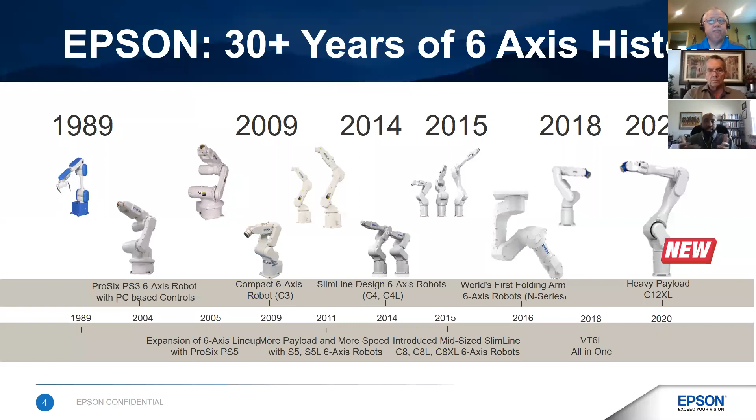But as you know, as you get done with that assembly, it has to go into some type of package, and that package has to get put on a pallet. So as you look at all of that, we want to start to move into owning that entire line, not just that process, but the entire line. And so with the C12, you see introduction to get into end of line automation.

All right. Well, just real quick, some of the basics. It is a 12 kg payload. It is a 1400 millimeter reach. It does use that Quartz MEMS. There it is. We're about to get into it. But you've also got it available as a clean room and an ESD model. Are you seeing lots of demand for the clean room environment for this size arm?

So because it's a new product, I would say time will tell, but we can say with our C8 and with our C4, the clean room, the ESD is something that a lot of customers tend to go after, especially when you get into medical, pharma, or places like that, where you have to really be on guard. You need to watch the particles, make sure it's a clean environment, and make sure you don't damage the equipment. In the event that you're doing medical, you want to have ESD models available to make sure you don't have that static discharge that could damage the product that you're handling.

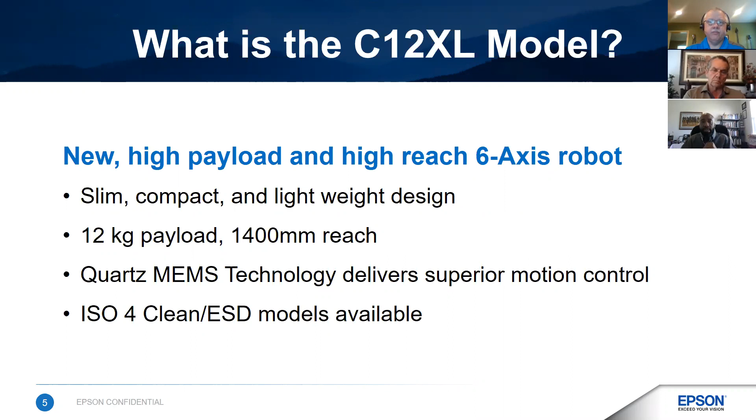So I would say on the C12, we expect the demand to be high, as we've seen it for some of our lower payload 6-axis. So we anticipate that it'll be there for the C12 as well. Okay, real good. Well, without further ado, I did want to be able to show what the robot looks like actually moving around. So this is the C12XL.

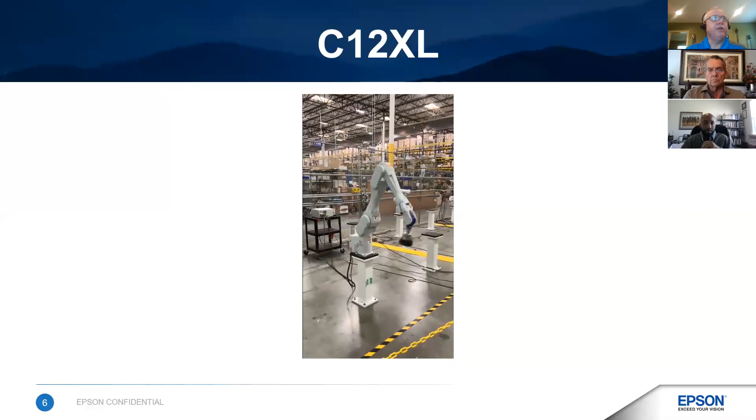It is a 1400 millimeter reach. It is a SlimLine design. One of the things that I've noticed with my customers in the C4 and the C8 series is that SlimLine design really allows you to fit in a very tight space, a very tight environment.

But one of the unique things that I liked about the way Epson designed the base for this is that it allows the robot to get very close to its own base. So that if you're in that tight environment, you need to load that pallet, you can get it up close and be able to reach it, and you still have the motion to be able to move towards it.

Casey, do you find that having this SlimLine design, this ability to have that broader reach towards the base of the robot, helps deploy this in applications that more traditional design 6-axis robots aren't able to do?

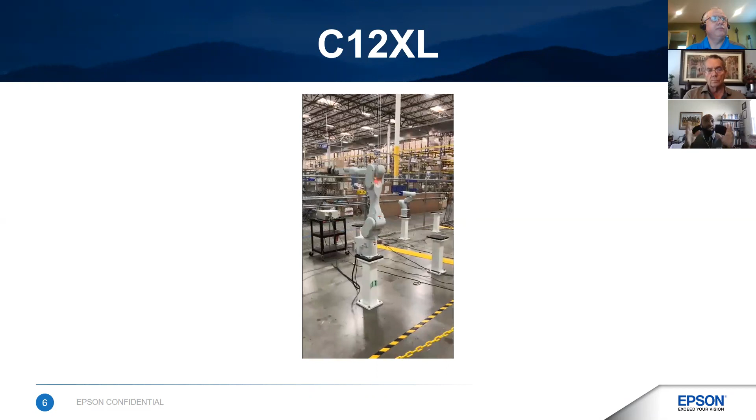It does, because when you look at traditional robots, when you get into that 12, 20 kilogram space, the base is a lot heavier, a lot bigger, a lot bulkier, which means you're limited in your movement. You won't be able to sit back and reach underneath itself if it needs to. And if you are confined in movement, you can't take advantage of the full 1400 millimeter reach that you have. So because of this design, I think people will be pleasantly surprised at the actual movement that it has.

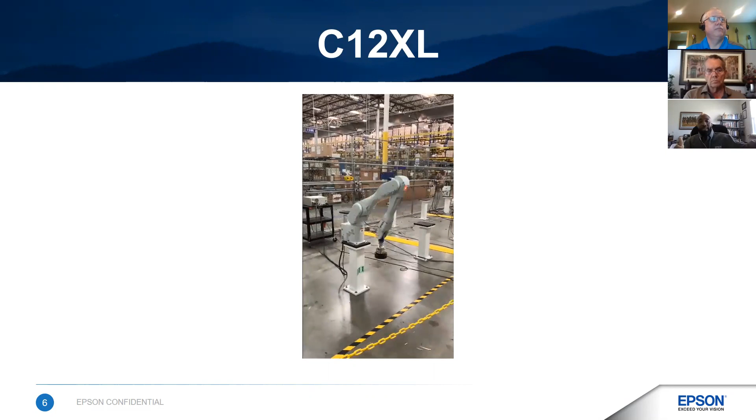And this video shows that this is a real product. It is out. We don't say, hey, it's going to be out within a month, 6 months, a year. This is out right now. We just released it this month. After we vetted and tested it, it is ready to roll.

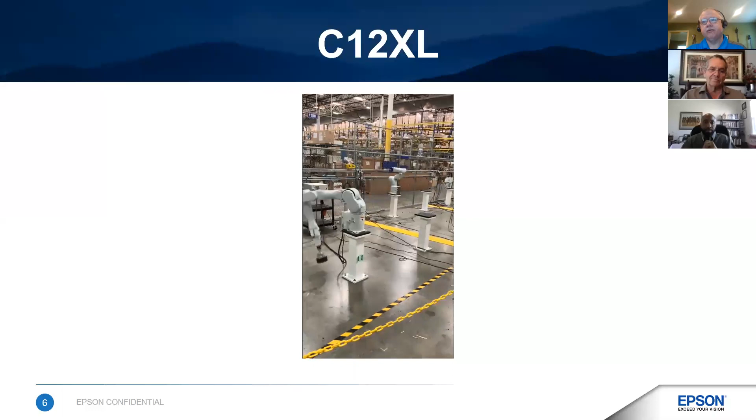Yeah. Hey, Michael, I'm going to put you on the spot for a minute. I know that with Epson, large corporation, we know about printers and projectors and the other things that Epson gets involved in, but also the Seiko watches. I know that over the years, Epson typically will deploy robots in their own factories first so that we don't get beta versions in the field. The bugs have already been tested and worked out on your own manufacturing lines. Can you speak a little bit on how Epson goes through the vetting process when new products come to market?

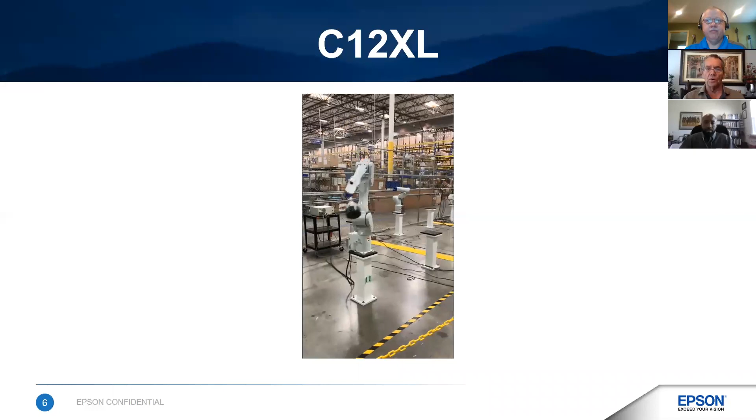Yeah, when new products come to market, we do use them on our lines as well as do a tremendous amount of testing, even testing that goes on here. After Japan has released and said it's all go, we will further test it and test a certain number of products that are incoming to make sure that we feel comfortable for it to go out into the Americas.

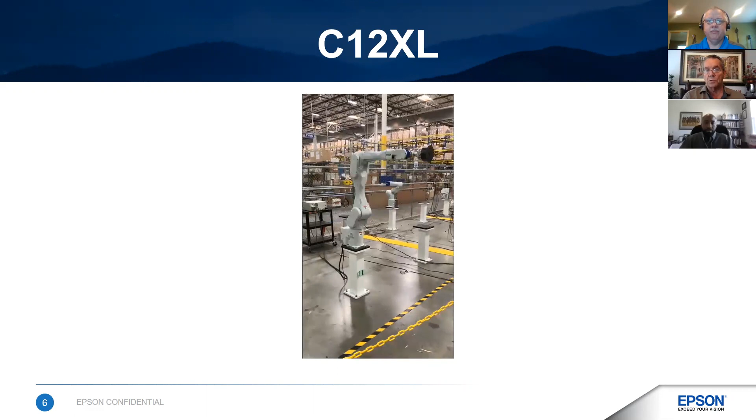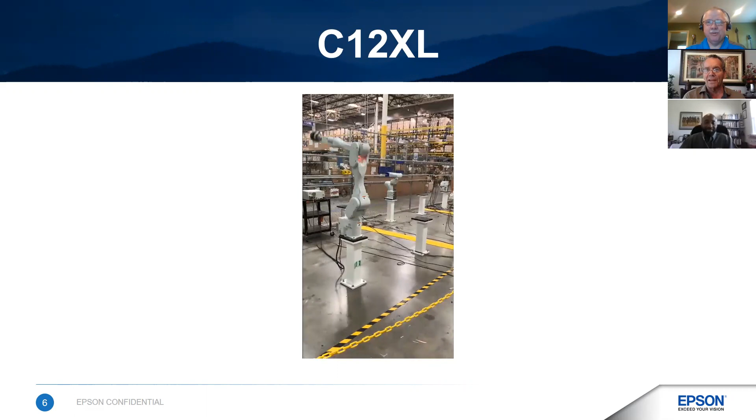So sometimes you'll see, and I get pressure on this quite a bit, a press release come out of Japan that says, the product's ready to go. And then we got people knocking on the door and I'm going, no, it's not ready yet. Right, we're not releasing it yet in the US, only because we haven't gone through the complete vetting process that we wanted to go through on this end. So by the time it goes out, we're pretty darn comfortable that it's going to do what we say it's going to do.

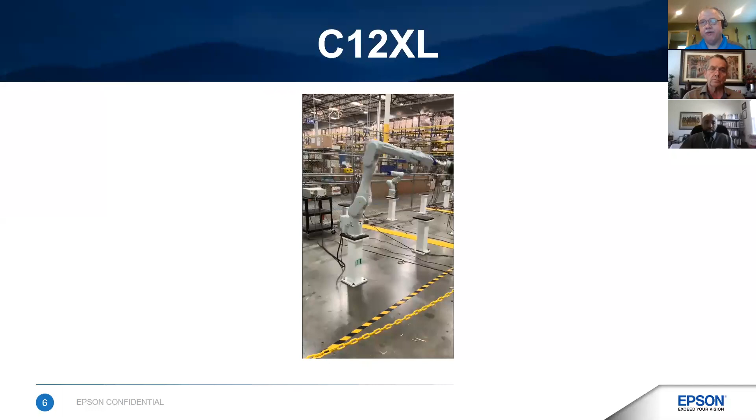Yeah. And I've actually got a testimonial that can speak to that. One of my customers that I began working with when the G6 series robot first launched, they actually bought the first G6 robot sold in North America. So some people get kind of scared of buying the first one of anything that comes to market. Are there going to be bugs or problems?

It began running production at a contact lens manufacturer in October of 2007 and has been running 2 shifts a day, 6 days a week ever since, and is still in production today. And that was the first of the G6s that was sold in North America. So I can vouch for the fact that when a product gets released in the Americas, it's ready to go and the testing's been done for it.

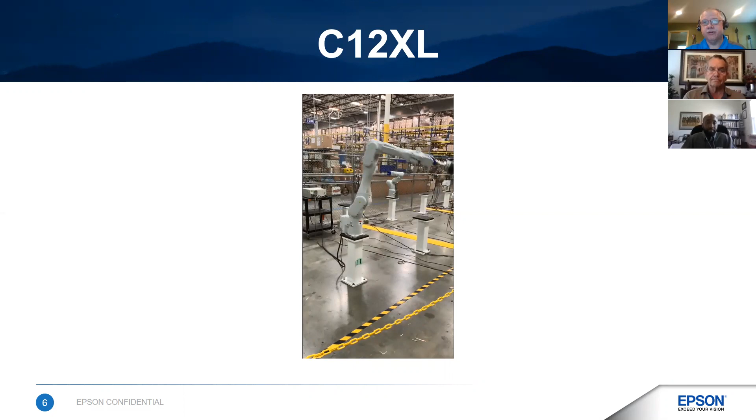All right, a little bit to what Casey was speaking about. Being able to work with the small to medium robot world, being able to work with a series of SCARAs and 6-axis down a production line. Now we have that robot that we're able to put at the end of line for the larger palletizing, the larger reach, the larger tray handling type scenarios.

And one of the things I do want to point out is this: all of the robot platforms that Epson offers, at over 400 different models, they all run off the same software, the same programming environments.

There's only one environment to learn to be able to interact with all of these various arms. Right, Casey? Absolutely. And I think this is very important, especially during times like now where we know people are working from home. And as they get ready to possibly go back to their facility, you have one environment, built-in simulator, and we'll talk about that more in detail. But with that one environment, you can start working on your programming, you can start doing the troubleshooting, you can look at the cycle times.

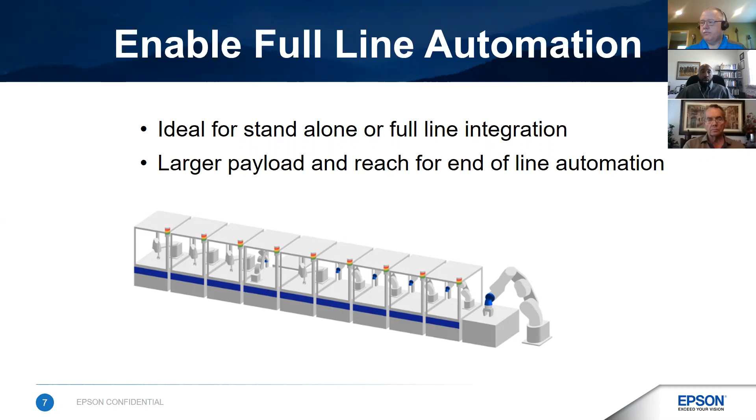And so by the time you're actually ready to get in front of the robot and download that program into the robot to get it to run, you are 85, 90% there. And I think that's the beauty of our software. One environment, and it programs our entire robotic line.

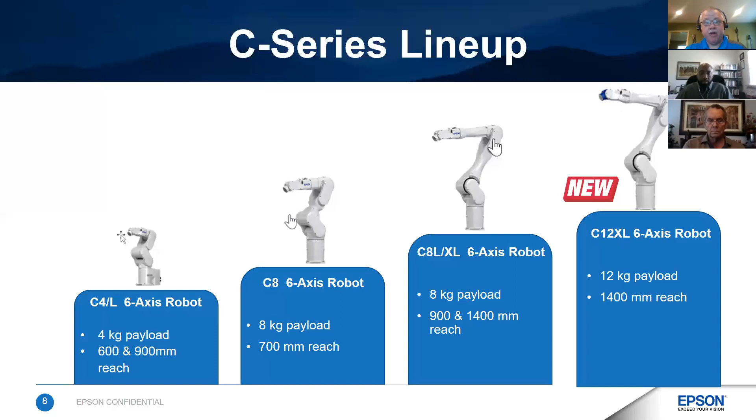Good deal. Well, here's the highlight of where we're at today. So the C4 has been out for a number of years. The C8 was 3 or 4 years ago. And now we have the C12 to be able to extend the line. So within that same SlimLine compact design, with the same programming environment, same software, same controller, we now have a new higher payload. We have a farther reach and we have more capability to go from the small down the line multi-stage all the way to the end where we're handling the full trays coming off of it. So this is impressive to have this breadth of product all within the same similar category.

A couple of the new things to point out, that Quartz QMEMS technology, and I promise I keep teasing everybody with this. The very next slide we're going to go over this in detail. But that QMEMS, to be able to add for the better motion control, is really a game changer. It allows for a reduced cycle time. It allows for better payload. But I also noticed with this robot that y'all were able to increase the wattage of the motors going out to the wrist. So joints 4, 5, and 6, we have more power than what we've had before.

We still kept the SlimLine design, but a robot of this size with this payload and range to be only a 65 kg arm in its total weight is kind of impressive, to pack that much performance in that small of a package. Absolutely. And then we've already talked about the ISO 4 clean room and the fact that it's compatible with all the controllers. I think one of the things that we really want to spend a couple minutes talking about is this QMEMS technology.

And the way I remember being trained on this was the QMEMS is a quartz crystal that is able to pick up the motion patterns of the robot so that you can make more corrections at a smaller level as the robot begins to move, rather than large corrections right at the end of the move to make sure that the robot is going to position and speed accurately and correctly. And this is something that's been around now about 5-6 years, isn't it, Michael?

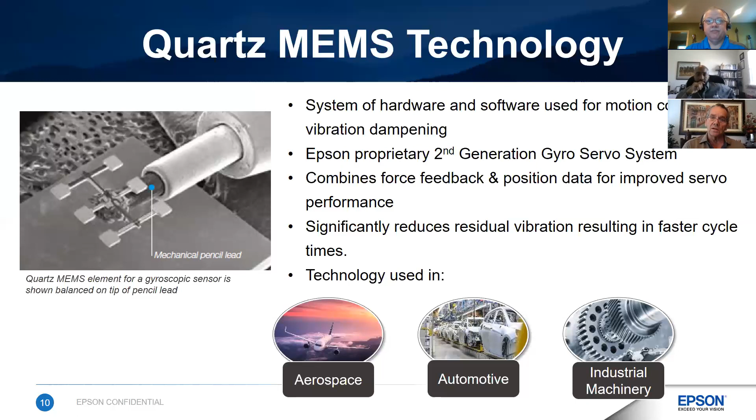So it's much quicker. You can talk about how long it takes to really get to that point in space. But if you've got a lot of settling time before you settle down and get there, then that, of course, adds to the cycle time because you've got to get to that spot. QMEMS takes care of that. So you're settling, you dampen out right away so that you don't have that settling time. So it's really done a lot for us.

If you have better control, you can release more of that power from that safety side of things over to actual increased payload and increased speeds because you don't need as much overhead to compensate. Did I describe that correctly?

That's pretty close. And one of the things I would say, and I think to make this very, very practical, if everybody here is used to robotics and they've used any other robot manufacturer, you'll notice as soon as you get done with their movement, your robot will need a half a second just to settle and get in the right position to do that assembly work or that place work in order to pick and place. You don't have that here.

And I think that's what we're trying to drive home, because we can stop that vibration, which means we can speed up your cycle time. That's probably the most practical way we can show this. I mean, because we can throw numbers out and say this is quicker than that, or they're quicker than us, or whatever the case may be.

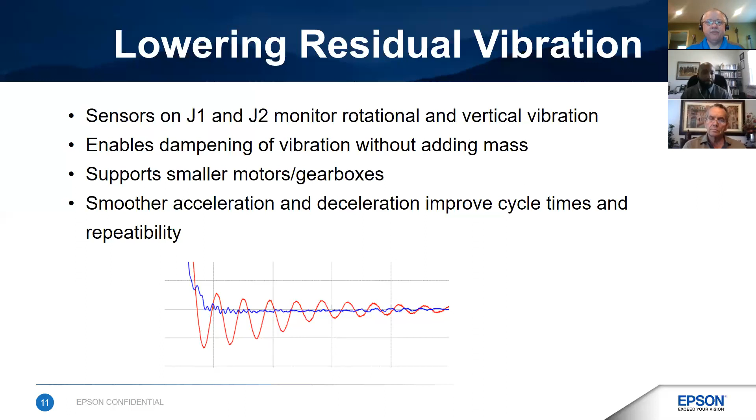Awesome. All right. So as we move on, let's talk a little bit about the size of it. So I mentioned earlier that the C12XL, the entire robot only weighs 65 kilograms, as compared to other robots out there that might be double that weight. What sort of advantage does this give to the machine builder, the integrator, the designer, Casey? This saves you on your overall cost, right?

Because if you have a larger robot at the end of the line that's moving, or that you need to throw on the 7th axis in order to move around, you have to upsize your frames, your bearings, your floorings, and everything, because you have to accommodate for that weight. So having something that's half the size can allow you to save costs as you put that entire cell together. And that's what we're talking about at the end of the day.

You can have that same reach, you can have that quicker speed, and you don't have to spend more money just to make sure you have a bigger frame to accommodate that weight and that mass, that force that comes along with that movement. Right.

And I'd also think it would help out when we go to put this on the 7th axis. With the RC 700 controller that we have, we can control up to 4 robots off the one controller. So by tying in that 7th axis, putting this robot on top of it to extend its range of motion, everything's programmed from the same environment. It's the same interface, the same commands, the same software structure. So this allows that adaptability to extend its range and its motion.

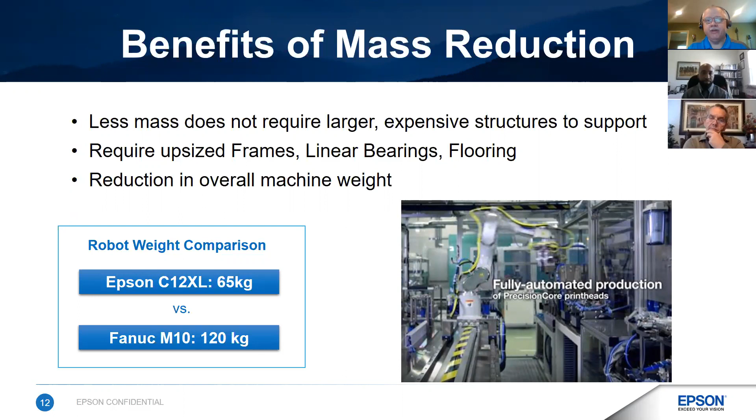Absolutely. All right. One of the other things that I saw in getting ready for today's discussion was the fact that we will have the ISO 4 cleanroom version. It also makes it ESD for electrostatic discharge, to be able to open up into medical, electronics, things that are sensitive to electrostatic discharge. And you've got the vacuum port built into it to be able to draw those particulates away. So I really liked that advantage.

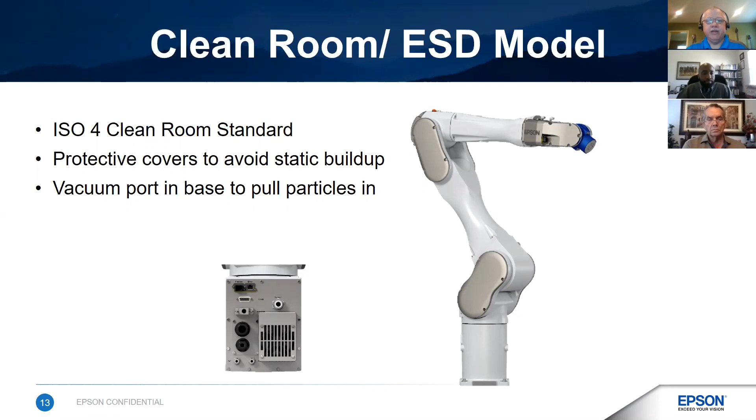But one of the things that really caught my attention was this one. I had the privilege to attend the Epson Vision class in California, as well as the programming class. And one of the things that always came back was when you go to do a mobile mounted camera, you've got cable management to worry about. So you've got to be able to route either that USB cable or Ethernet cable back.

Now you've got an RJ45 Cat5 built into joint 5 of the arm. So instead of having to go all the way back to the base, you're able to plug a GigE camera that's going to be on either joint 5 or joint 6 right into it, and it reduces the cable management that has to go back. Absolutely. It's a cleaner look for a lot of guys, as you mentioned.

You're not doing that cable routing. Now, routing within the pneumatic lines is something that we've done with a lot of product lines, but we're happy to see it extend into, like you said, the Cat5 cable and the D-sub pin. So now you don't have these cables wrapping around your robots at the end of the day. Everything is routed in there. It's a very much cleaner look. And also more holes to actually mount your end of arm tooling as well.

So this is nice. And as we get on some other products that we've redesigned, you'll see where we're going and how this will help you moving forward as you prepare for your tooling on top of your robots. So, for example, if I have a piece of end of arm tooling that had 2 pneumatic grippers, I could then come up to the hard points that are on joint 5 to bolt a small valve stack, feed my pneumatic lines. I can feed my electrical pass-throughs right to the 15 pin. I can feed my camera right to the Cat5 RJ45 plug at the end.

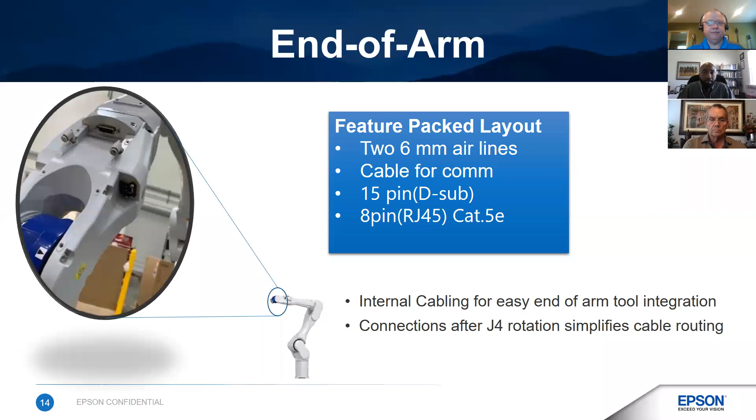All right. So this I thought was really unique as well as I was getting ready for this. You're now offering different options as far as the cable management at the base. So rather than just the pass-throughs that go through the arm, you're now offering a cable downward option to go down through a tabletop rather than just off the back. What does this mean for the machine builder, Casey? This basically means you can have the cabling whichever way you desire, right? We don't force you in one particular way or the other. Traditionally in other robots we have, it's that backwards approach that you will see right there. But if you want it downward, you have it.

And also it will help with your mounting, right? You may say, hey, for this particular style, I need to ceiling mount this, or I need to mount it on a wall. It doesn't necessarily have to be tabletop style. So we give you that option. And with the different cable options, you can run that cable which way you want to. So that's pretty new for us, but a very good thing nonetheless.

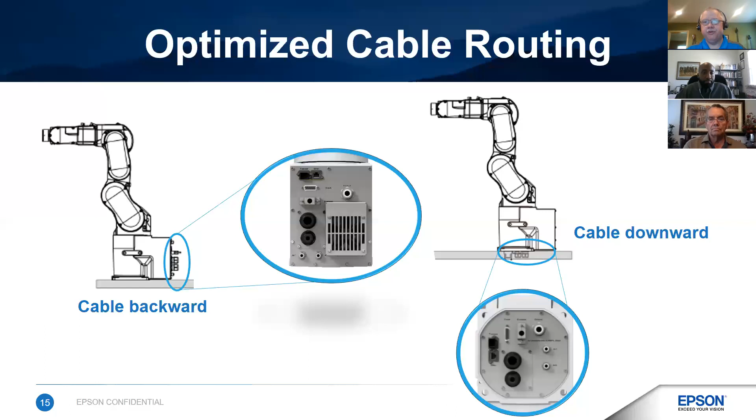It also looks like it would clean up the top of your fixture so that if you have other things in the area, rather than having to leave room for those cables coming off the back, with them coming out from underneath, you've got more work surface to be able to use in your design. Yeah, you can work back there. Yep, absolutely.

All right, the RC Plus software. This is a powerful package. I've had the privilege to work with this for a number of years, and one of the things that I really like about this is the fact that all of the robots are in the same software environment. I have used this many times with the 3D simulator that you can see on the screen, and I think it's really unique. I don't know of any other company that offers a full 3D simulator to be able to take advantage of for cycle time studies, for capability studies, for reach.

And we have customers on a very regular basis reach out to me to give me the specifications. I'm doing a pick and place routine. Here are my distances, here are my payloads. And I'm actually able to do a feasibility cycle time study right from the simulation software. And the thing I like about that is if I wanted to verify, can I use a C12 in this? Do I need a C8? What's the cycle time difference? I can take the same program and drop it from one to the next within the simulator. It's going to run because it all uses the same command and same structure.

Yeah, so a couple of quick things to note. You will need version 7.47, which is the latest that we have right now that has the C12 within it.

But as Kel mentioned before, our entire robotic line is right there within the simulator, right? This is very good for you guys that are working from home right now who do not know when you have access to the robot, or you have a design in your head and you want to know what that cycle time would be, or you want to play around with different styles.

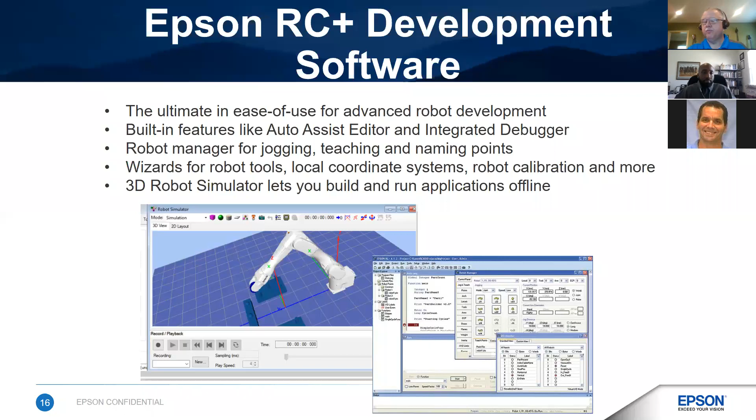So let's talk about options right quick. And Casey, these options aren't limited just to the C12. These are available throughout the robot platform. Things like the integrated vision and the new IntelliFlex part feeders, different field bus options, as well as the force feedback. And there's more options that are available than just what's listed here, but this is available for almost the entire range, just depending on the individual robot performance and capability. But it's not just a C12 option list.

That's correct. That's correct. And I think sometimes we need to throw it out there because people look at robot models and then just don't understand how we try to make the whole integrated package very easy at the end of the day. With the IntelliFlex, I mean, that's parts feeding, right? You can flip parts. You can figure out what the right parts assembly you are. So that flex feeding system is very, very crucial. And the way we made it, that could be a whole other webinar in itself.

So I won't go into big detail, but I'll just say, if you've worked with other feeders before, there's a very simple process to work for parts feeding, and the way we've integrated it into our software is second to none. I mean, anybody can get it up and running very quickly.

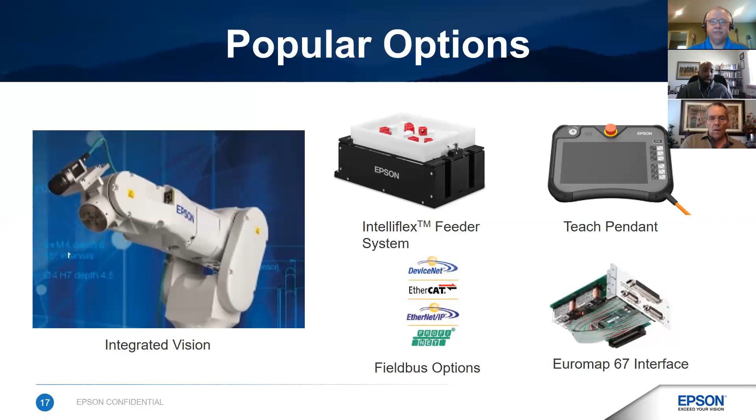So I thought that was impressive to be able to gain that extra performance out of the unit without drastically increasing the weight or the overall size of the base or the bolt pattern that we have to have for it. I thought that was quite dramatic. I agree. I mean, you're not sacrificing on anything, and you do get more payload. So you're absolutely right. Okay.

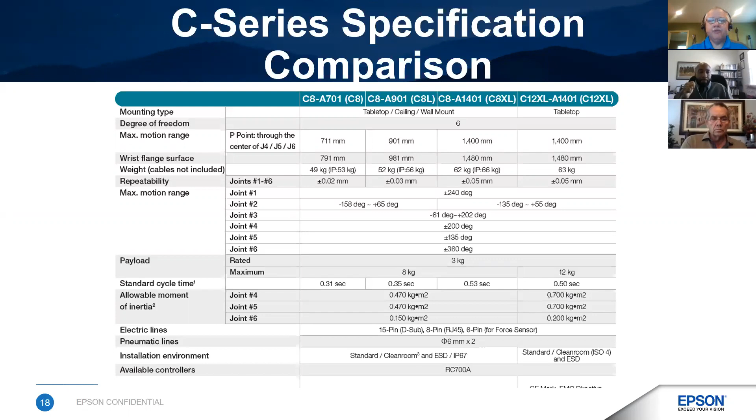So real quick, this does come up for machine builders and whatnot. Now these are just raw robots themselves, but it's a very reasonable price point to be able to get started within this realm for this payload. So that was one of the things I did want to mention.

But this is just the raw robot. You're not going to get that with a program ready to run. There's still development work that needs to be done with it. But before you move on, I think we probably need to point out that price actually includes controller and cables, right? Sometimes some guys may think that there's additional cost for a cable, additional cost for a controller. No, this is the price. You get the robot arm, you get the controller, and you get the necessary cables to move forward.

So this is a great price for clean room and standard. Good deal. And simulation, the 3D simulator. And one of the things I forgot to mention while we were on that slide was the Epson simulator allows you to bring in a full STEP file of the machine that you're going to put it in, import it into the environment, and you're able to attach your end of arm tooling STEP file to the tool flange or the quill of your robot. So now you can test the unit out as if it's already built into your machine before you cut the first piece of metal with it, to make sure that you're going to clear, hit your cycle time, and have the reach necessary.

All right, let's go into our next update. So the LS-B series, this is an improvement on your existing LS. And the LS was already a great mid-performance level SCARA, but you've got some new features that are coming out within this series that really adds to it. And one of the things I noticed right here was the fact that you're adding the clean room models now available into the LS series.

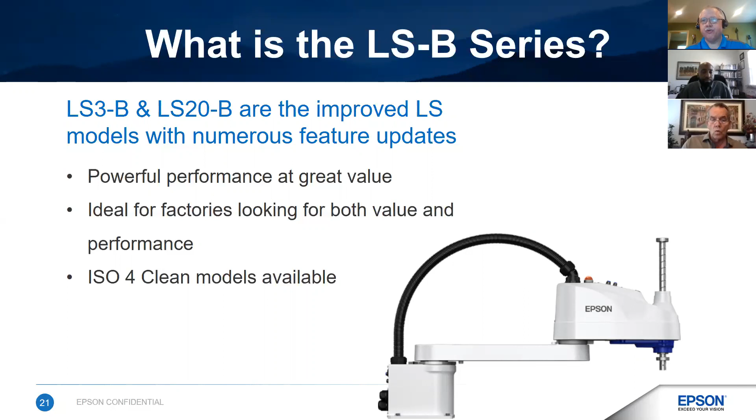Yep. And as Michael said earlier, the LS series with the QMEMS technology has been there since the beginning, and that's still there. So we still have that ability for more precise control and decreased settling time within the entire family.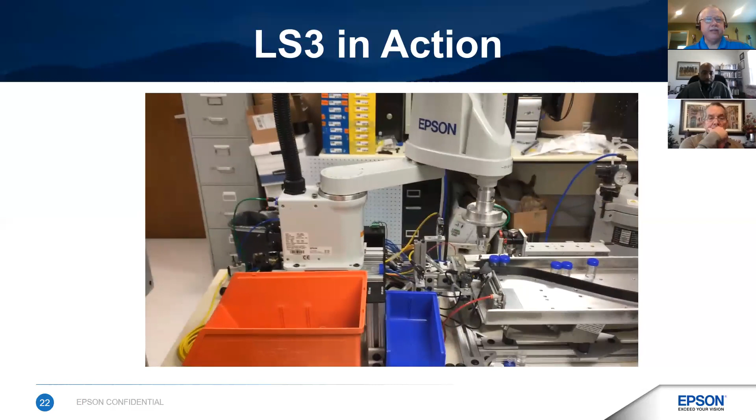One of the things I did want to showcase, an actual LS in action. So this is an LS3. This is running at the same contact lens manufacturer that I had referenced earlier. These are the vials that would go to the end patient. So there's a jar of saline solution here, and there's a cap with a holder for the custom prescription lens to go into. And they had a person sitting here at their station, and their entire job was just to dispense saline solution in these bottles. And they would sit there 6 hours a day, every day of the week, doing nothing but get these bottles prepped for the contact lenses to go in.

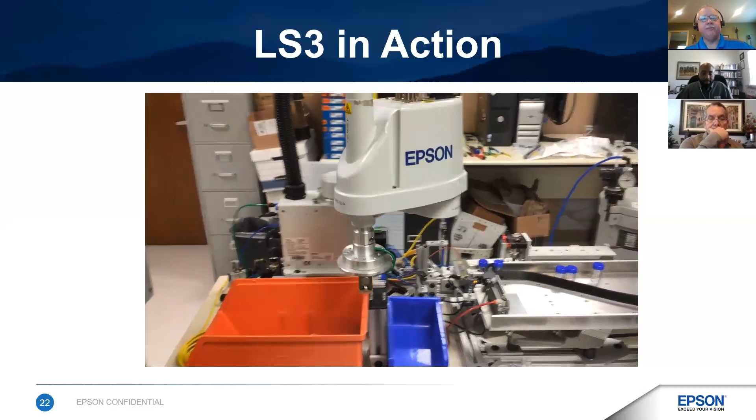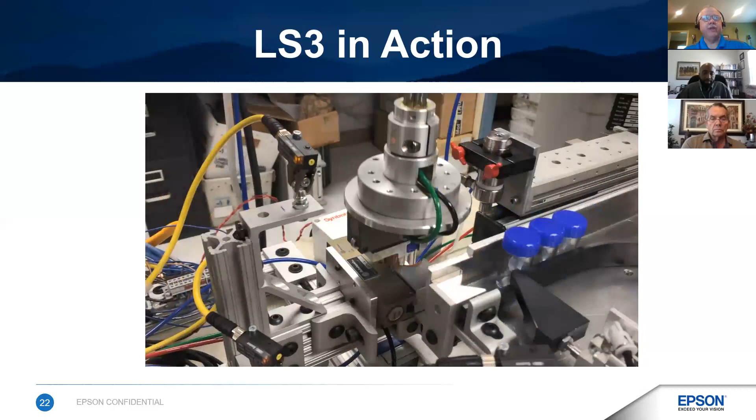And this is an application that we were able to put an LS into, to be able to automatically pull the caps off, fill with the saline solution, and allow them to repurpose that operator to a different task that required more human interaction. And now this just fills the bottles and off they go, and has been running very well for them.

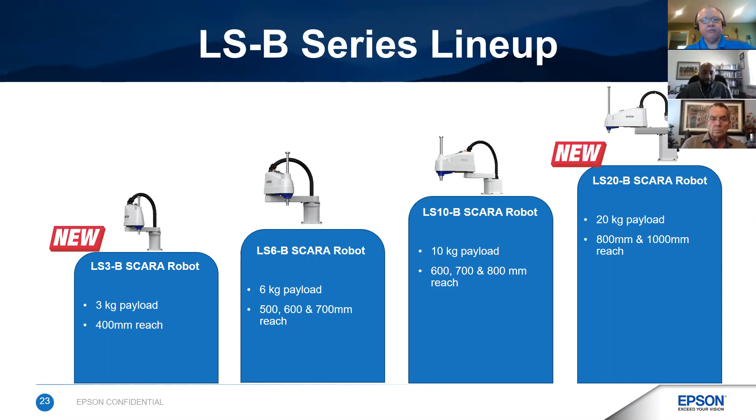All right, so as Casey alluded to, within the LS family, we start with the LS3, 3 kilogram payload unit, LS6, you may pick up a pattern here, 6 kg, the LS10 for your 10 kg, and the LS20 for the 20 kg. And rounding out the line, we now cover a nice range on the mid-performance unit. And as we said earlier, we've got the QMEMS that's there, so we have better control.

But a couple new things that I saw with this series that really stood out to me was the fact that you've gone with absolute encoders. So we no longer need to have batteries, and we no longer need to have in our maintenance schedule to change the batteries out in the robots. I would refer to this as the January 2nd phone call. Oh, we shut down the robot over the holidays and we went to turn it back on and we're getting an error message. Well, the rechargeable batteries went bad and they didn't get replaced, and now we're UPS readying them in. That problem's now been eliminated, hasn't it, Casey?

Absolutely. I was going to say that's very important, because if you experience a shutdown, robots on the shelf, whatever the case may be, you don't have to worry about losing your information. It's still there. No, absolutely.

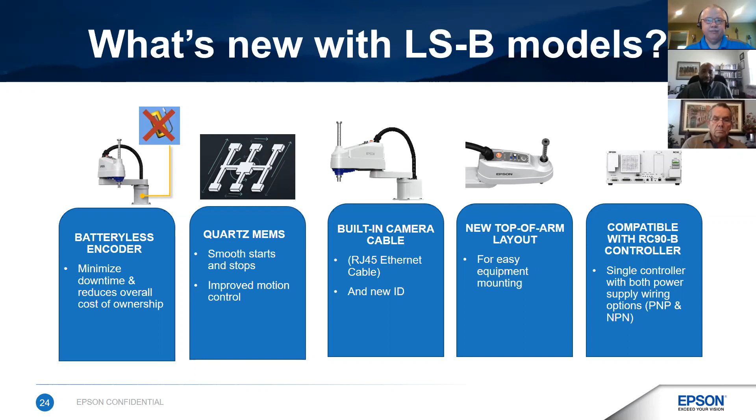I'm going to go to this next slide to point this one out. This one I really, really liked. Just like you've done with the C8, just like you've done with the C12, you're now incorporating that RJ45 camera port right into the top of joint 2. So instead of having to pull the camera cable all the way back and secure it and worry about it getting snagged or coming loose, or that extra thing that has been added and routed, now everything is just right through the duct, and you're able to put that right onto the top of joint 2. That's a huge improvement for anyone who's ever worked with mobile mounted vision before.

Yeah, I mean, you're right. To have that port right there, but also the additional screw holes for mounting, right? So as we move forward, you'll see a pattern here, easier for you to put your tooling on our robots. And I think that's where we're going with this overhaul, just to make it a cleaner look for you guys, to help reduce your cable routing and wiring that you would have. So this helps you out tremendously. If you've ever been frustrated about mounting cameras on robots before, you'll find quite a joy in this slide.

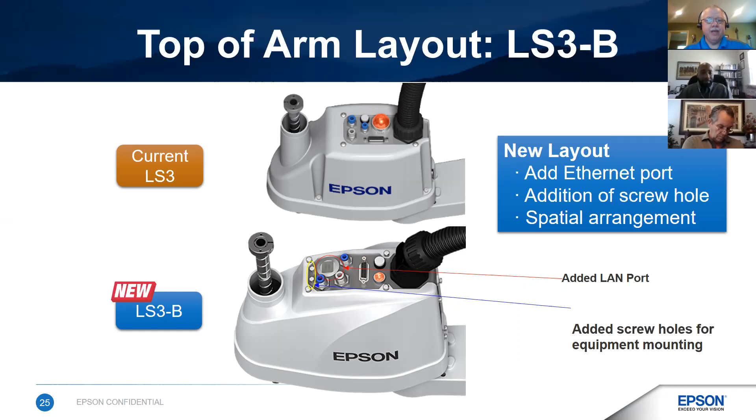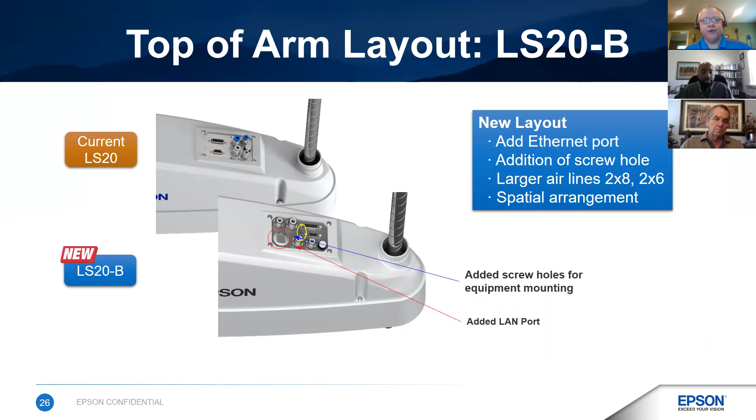This is good. Absolutely. Like also on the LS20, just like we were talking about, the added LAN port for the camera communications, the pneumatic line pass through, the electrical line pass through, and the extra mounting holes to be able to put your valve manifolds, sensor amplifiers, whatever it is that you're needing to put closer to your end of arm tooling, you've got additional hard mounts to be able to take advantage of for that design.

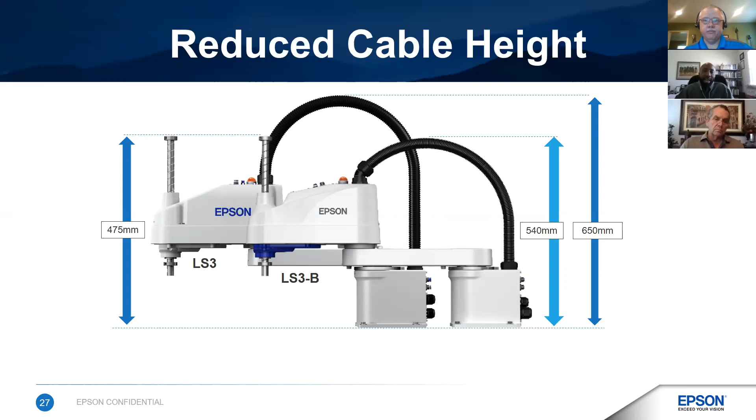I mean, because the last thing you want to worry about when designing a cell is the cable, right? The cable routing. I have to make sure I accommodate for that extra 110 millimeters of cable routing that's there. So knowing what your quill size is, knowing the height of that, knowing that you can design to that and place it within the cell is huge. It's no more gadgets. Okay, good deal.

And then, of course, the clean room. We've not had a clean room in the LS series before. So being able to fit the ISO 4 clean room, obviously with a SCARA, the protective bellows to keep the particulates from getting into the air, as well as the vacuum port to remove any wear particulates out of the robot to make sure that your environment remains clean and protected. This is a new option we've not had in this series before.

But there's one thing, Casey, I think is important to point out. Historically, with Epson, when you purchased a robot that was clean room, it was also ESD rated. In this case, this isn't the case. In fact, when we were doing our dry run yesterday in preparation, I made the statement of clean room and ESD, and Casey had to correct me that in this case, this is not ESD compliant. So if you are a machine builder or integrator that's listening to this webinar, please keep in mind that in this particular case, you don't automatically get ESD with a clean room in the LS series. That's correct. Okay.

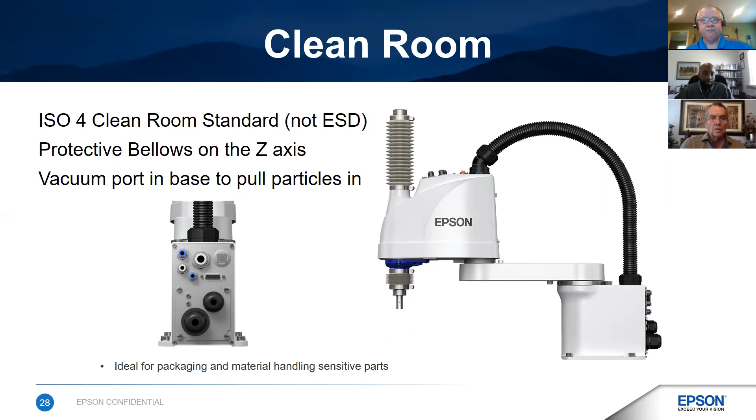We also have a new controller for this one, Casey. Historically, the RC90, I had to order it up front either as a PNP or NPN. Am I reading this right, that now I only have one model and I can wire it either way? That is correct, right? So the 90B controller supports both PNP and NPN wiring, which is very huge. As you know, or customers learn, this is a big deal.

A lot of our other controllers support both wirings, and it's very good to have the LS controller now support both wiring as well. It makes ordering so much easier for you guys, and now you only have one particular model that you can keep on your floor. So you don't have to keep a PNP controller or NPN for this particular one. You can have one controller that supports both wiring, and it's better for everyone.

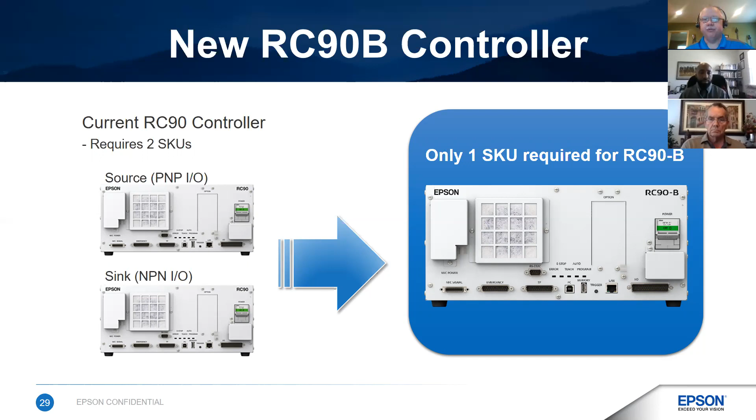Yeah. One of the things that I really like that Epson has done when the RC90 first came out and the RC700 came out is the attention to detail to make sure that all of the maintenance interface is all on the one plane. The filters, the batteries, the electrical hookups, the connections are all on the front face. So when this goes to get deployed in the field, it goes to get mounted into an enclosure, there's only one face that you have to plan for access to. You don't have to get to the other surfaces for any of the maintenance portion of it.

Yeah, I was gonna say, this might not be a big deal for engineers, but if you're a maintenance guy, you don't want to dig in a cabinet longer than you have to, right? So this is right in front of you. This is a good thing, a very good thing.

Yeah. Now we talked about this earlier. The integrated vision, the IntelliFlex feeders, the various teach pendants, the various field bus protocols, we still got a nice list of options that we can use within the LS series. And this would be the same IntelliFlex feeder that we can use on the LS, or the same vision on the LS that we would use with the C12. Again, that commonality of all of the different components and accessories working with each other.

That is correct. So there are some options that work across the entire product line, but then the LS are limited in some others. So like that TP3 pendant that you saw within the C8 series would not work with the LS here. Or we were actually just talking about this yesterday, Force Guide. So there are some options that do not apply to the LS.

So I just think you really want to have a conversation with ACS and with myself to make sure we can get you the right accessories that you would need for your particular project, so we can say, hey, the LS or really the G or whatever the case you may need, we'll get you in the right robot.

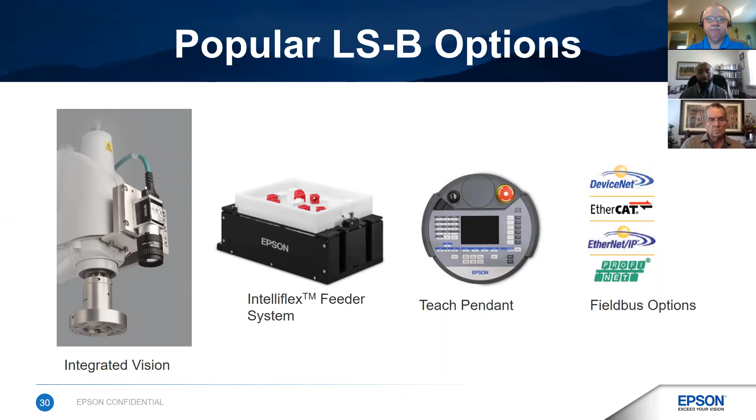Yep. Okay. I did want to highlight just one more time. We've talked about different SCARAs. I mentioned the G series in my story a little earlier. We've talked about the LS. The T series, we don't want to forget about. That's an incredible platform. So this kind of goes hand in hand with what you were just saying, Casey. The T series, the all-in-one, the SynthiS series, where the controller is built into the base.

Price point on that starts well below the $10,000 price for a full robot. So the ability to have that one small basic pick and place system, but of course the controller for that being built in, just like Casey was alluding to, isn't compatible with all of the higher end options. Also, the speed's a little slower on that one because of the wattage motors that are in, but if you're doing a basic pick and place, it's a great option.

The LS series, mid-range, mid-performance, it's faster than the T, not completely open to all the options, but it's also a more mid-price point. And then the G series, man, the 24/7 run at 100%, put any option on it that you want to, run multiple robots off the one controller.

It really is a phenomenal workhorse platform for those applications that really demand that high intensity uptime. So with today's conversation being focused around the new products, the LS-B series is the new one. However, upcoming, there will be a webinar that we're going to be doing on the SynthiS talking about the T series. We'll also talk about the G series in a future event to show its power and capability.

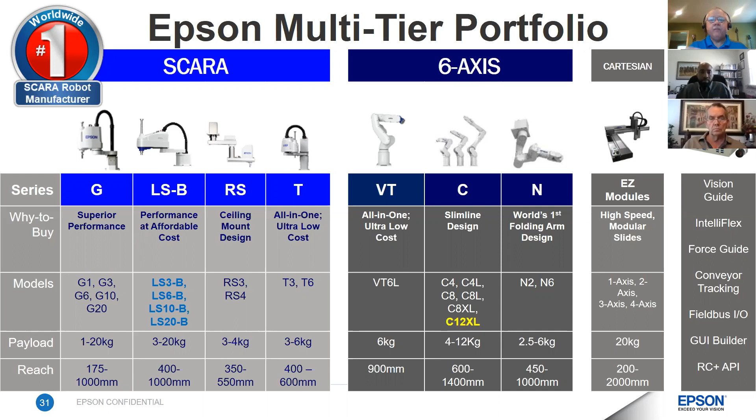But just real quick, for our audience members that might have an application they want us to look at, send us parts for evaluation, we may recommend one series over the next. So one thing I did want to point out, just a couple of the differences. When we talk about the T series, the controller's built in, lower cost, basic system; LS3 for a mid-range performance unit; the G series for our full performance unit. I did just want to highlight a real quick speed test between them.

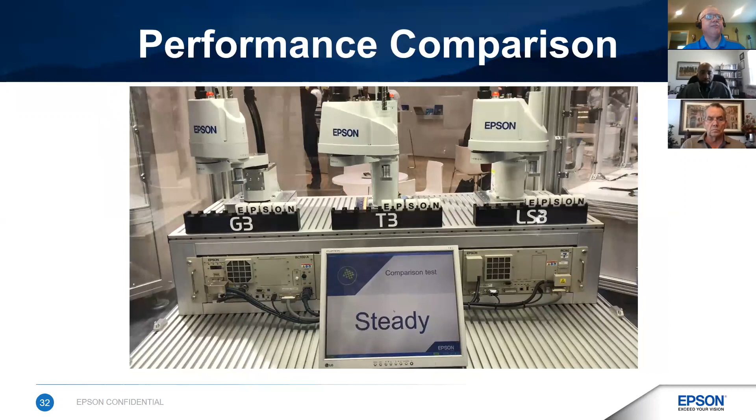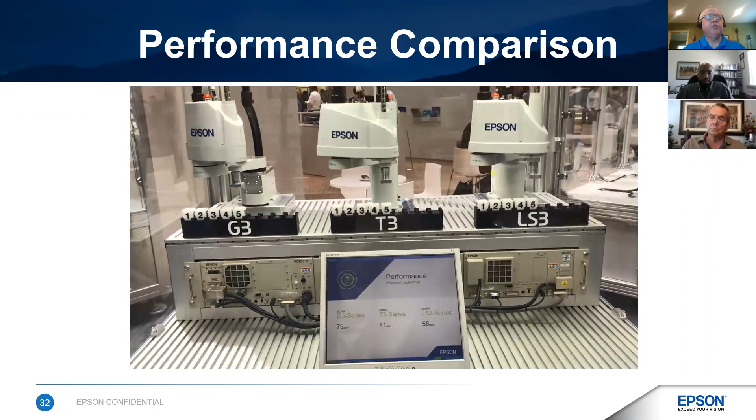They've all got the same quality, the same RC+7 software environment to be able to work with, but there is a performance difference between the robots so that they can be tailored. As you alluded to earlier in our discussion this morning, they're tailored for either a lower cost, more basic application, or that full featured high demand 24/7 output that you've got to get through with a faster cycle time. So just real quick, Casey, how does having these different platforms that are all SCARAs, in this case, all a similar reach, all the same payload, what does this provide Epson over some other folks in the marketplace to take care of your customer base?

Well, I think it gives us more depth into the market, and more ability to actually look at your application and figure out what do you need and what are you looking for. Because for some people speed might be the bigger issue. Other people, you might have that time needed to do that assembly work, right? So when you look at cycle time or performance, you may not need the workhorse, the G, right? So why would you want to pay that money if you can get it done with the T series or with the LS?

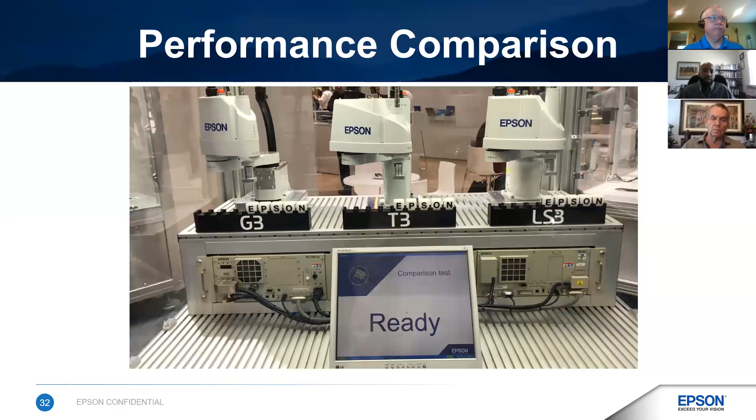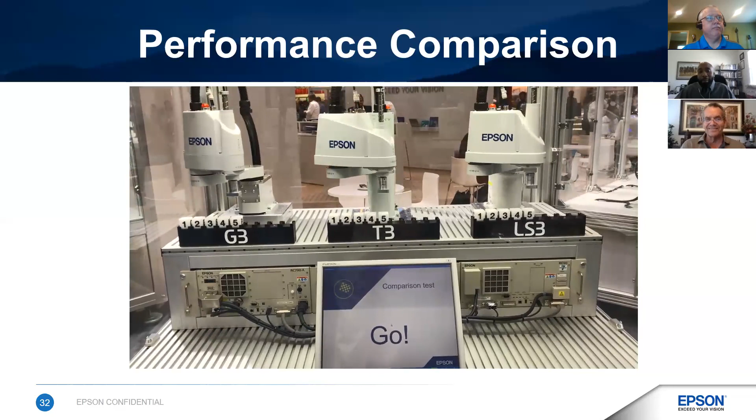So I think this is where we say we are not just precision specialists, but we are really consultants. We want to talk to you, figure out what your goals are, what you're trying to do with your particular project, and then based on your goals, we can say, hey, this is the right recommended series for you. And then of course, we will run the simulations with you, we'll walk you through it, and we'll get you right there. Once we have a simulation, once we understand what you're trying to do, I don't want to say 100% of the time, so I'll say 99.98% of the time, we will get you where you need to be. Is that pretty fair, Kale?

I think that's great. And one of the other things I wanted to point out with the simulation software, I make this a regular habit. When someone does send me their specifications they want me to do a cycle time study for, within the simulator, I can pull up my T series, my LS, my G, and I can let my customer know here are the cycle time differences between them and what we're able to achieve, so that before anything gets bought, designed, or metal cut for a stand, they already have a very good realistic idea of what they can expect performance-wise out of the system. And the software makes it very easy to get that set up within the simulated environment.

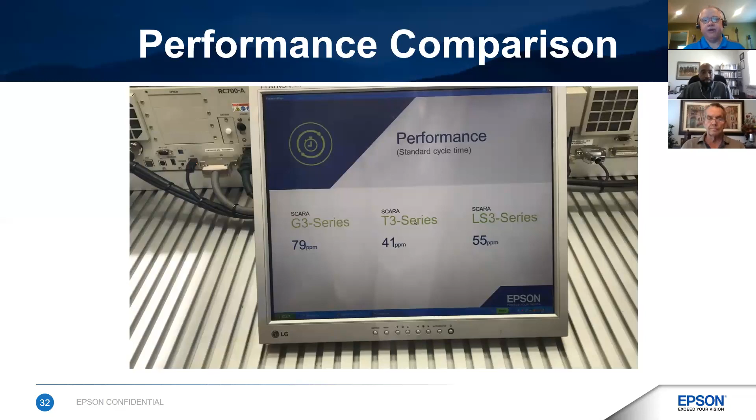All right, our last thing that we're going to get into this morning is the updates to the VT6L. So the VT6L was released, has it been 2 years now, Casey? Or is it just last year? Just last year, right? A year and a half. Is that fair? About a year and a half, yeah.

I think so. Great product, phenomenal product for its price point. For a 900 millimeter arm with a 6 kg payload, it is just incredible. Controller built into the base. This is part of the T series family, part of the Synthis series robots. 110 volt AC power, so no transformers, nothing special. No extra controller to mount, everything's built in, all in one.

And now that's being extended to include the clean room and also now an IP67 washdown version. So this is going to be a new area for this. It is. And this is what customers have been asking us for, which is, hey, you know, the VT is nice, but if I had a clean room version, that'd be awesome. Or if I had an IP67 version that I could do washdown, that'd be great. So we've heard you, we understood, and we started designing towards it.

So now what you have is this clean room ISO 4 that just came out, and then in a couple more months, we'll have the IP67 version that's on its way. Okay, but these are available to work with within the simulator. We can get CAD drawings today if we wanted to go ahead and start looking at it for an application. You absolutely can.

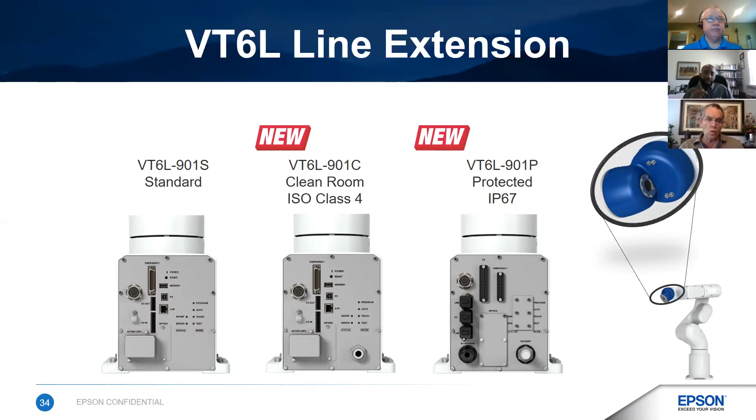Yeah, it's very different and very good. Overall, you will have to wrap your cables from your base up around. But you're right. As you get ready to connect to your end of arm tool, you can go right through the center. So it is a very neat design.

All right. The other thing, now this is true with really all of the T series, but specifically with the VT6L that we're talking about, since the controller is built into the base, I don't need an electrical cabinet, I don't need an air conditioner, I don't have to worry about those types of accessories. Or if I do have an electrical enclosure on the machine, I don't have to oversize it to accommodate the robot controller. It only has to be for my other equipment on the design.

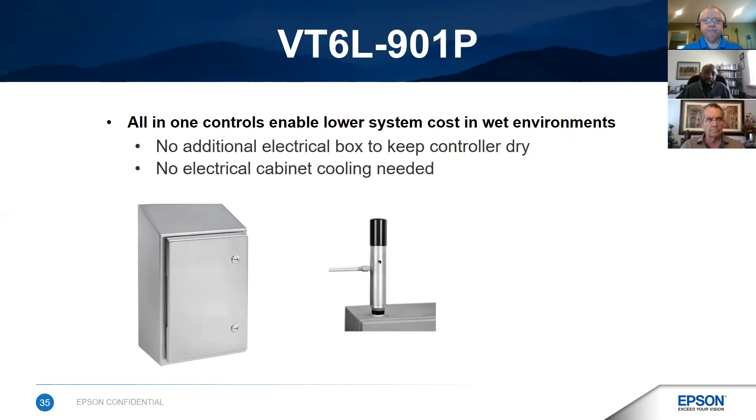So I thought this was a nice point because it lowers the overall cost of the machine build: smaller cabinet, lower cost, less wiring that has to go along with it. It does. Everything you need to control that VT6L is right there in the base of the robot. Yeah. This is one of the ones that's amazing to me. We already knew this from the last year and a half.

VT6L, full 6-axis robot, 6 kg, 900 millimeter reach for under 14 grand. That is a very significant price point, but now I can upgrade to a full IP67 washdown below 16 grand. That's an amazing price point, because there are no cables that you have to buy. The controller is already built into the base, so it's controller, cables, and all at that price point. You're ready to put it on a stand, put your tooling on it, and begin production.

Yeah, you're absolutely right. I think people were impressed when we put together the VT at 13. And once again, we're not here to gouge people. We really want to make this very affordable for you. So we're giving you the clean room. We're giving you the IP67 version, less than $16,000. Absolutely amazing.

All right. One of the things I do want to point out, we did purchase a VT6L for our demo inventory. It has already shipped from Epson. It is due to arrive at our facility next Tuesday, May the 19th. So from that point on, we will have a VT6L that we can do live work with. So we can schedule an additional training webinar we could interact with right now while we're in the shelter in place.

Obviously, we set up a video conference, but in addition to the simulated cycle time study, which is generally as good as maybe plus or minus 15%, we could actually hook up a live robot and get a more real world cycle time study if needed. Just to make our customers aware, we do have in our demo pool a T3, a T6, and an LS3. So that gives us 4 Epson robots within our local demo pool in the Southeast to be able to perform those live studies with.

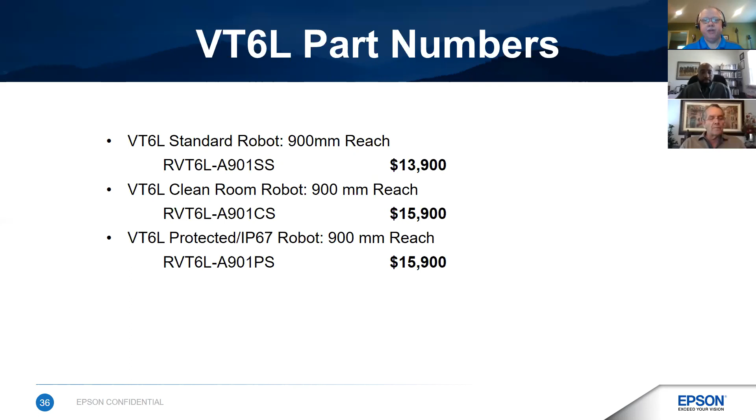So if you're attending in our audience today and you have parts that you would like to test, you've got an application you would like us to do some feasibility on, send us the parts, send us the details. We would love to be able to work on that with you. And that kind of sums up where we're at.